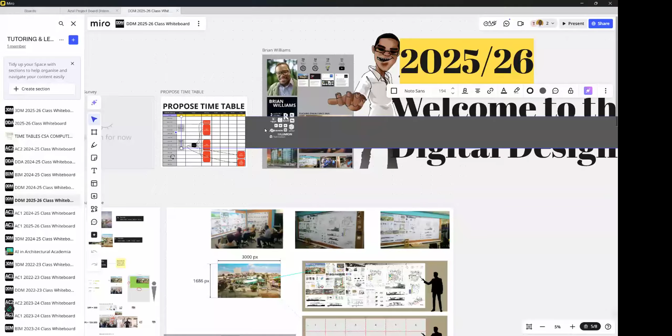All right, well for me, I use a few. I tried to put most of it on this thing here. Here we go. But I never got around to Rhino though. But I've used a few, and what I can tell you is I did put some of this together. So I've used a few 3D programs, and the idea is that for most of us, this will probably be our introduction to learning 3D.

And what we're going to do is we're going to kind of transition from 2D into 3D. Over the next couple weeks, well, hopefully we'll see what happens at the end of next week. Hopefully we have internet and light and everything. But I want to show you guys how you can use 3D to assist in your design process, right?

And I think to get a good balance for your architectural process, you need a program that you can use. You need some kind of tool to conceptualize. That tool can be as simple as paper, but I want to propose to you SketchUp as a tool to help you conceptualize ideas before you start to develop them further. This is before you go into Revit and into the rendering and all that stuff. This is just when you're ideating, like when you bring up a sheet of paper and you're just doodling and making some sketches and exploring some masses and sizes. Over the next about 2 weeks or so, we're going to be exploring how we can use SketchUp to do that.

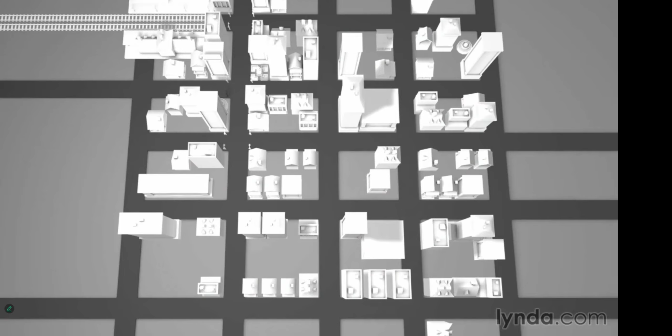The grid of the city represents 2 of the 3 axes. Any intersection in the city could be described via 2 numbers. For example, we could go to the building at the corner of 3rd and 4th. The floors of this building would be considered the 3rd axis in our 3D world. So a coordinate of 3, 4, 5 could be seen as the 5th floor of the building at the intersection of 3rd and 4th. In a 3D application, this same measurement system is how we manipulate objects.

When we move an object in 3D, we think of it as moving in a straight line, but the 3D application itself measures this distance along x, y, and z. Similarly, when we scale objects to make them bigger or smaller, we measure the change in size along x, y, and z. And when we rotate objects, we can measure that rotation as happening along a combination of the x, y, and z axes. As you can see, our natural world can be described using 3 sets of numbers. Understanding this coordinate system is the first step to working in 3D.

When we work in a 3D application, we're typically working in what's called a viewport. A viewport is simply a 2D window onto our 3D world. This window can be configured to view our scene in a number of different ways. So for those of you who managed to get onto the website version of SketchUp, which is here - there we go - if we choose create new document, this is our viewport.

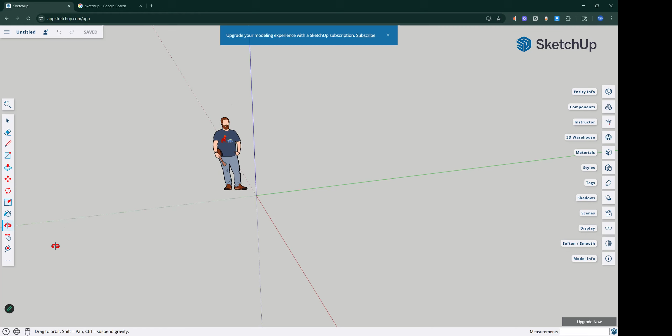For example, if we want, we can take this scene and view it in what's called wireframe. Now these wires are basically the geometry of our scene. If we want to go even simpler, we can go into what's called bounding box mode, which just shows broad outlines of the objects in our scene. Typically, though, we want to see the shapes of our objects, so we can also do what's called smooth shading.

Smooth shading allows us to see the shape of our objects. And if we want, we can also superimpose our wireframes over our shaded view to give a better sense as to where the detail of our geometry is lying. In addition, we can also add color, texture, and lighting.

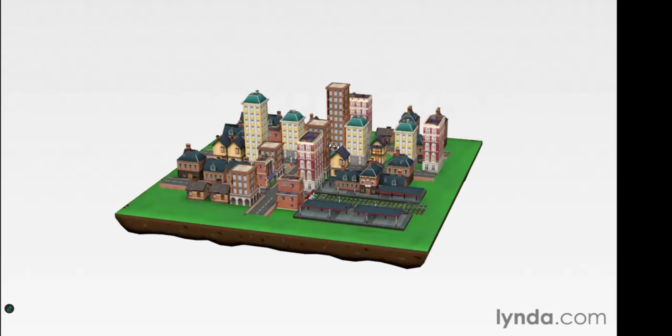Some of these features are software dependent, so each application will be a little different, but all the major applications will allow you to see your scene in multiple ways. Because we're viewing our 3D scene in a flat 2D window, we will need to navigate. Every software is a little different, but they all have pretty much the same navigation controls. Typically, we'll have something that allows us to orbit or rotate the scene.

What we're doing here is rotating a virtual camera around the scene. If you can picture in your head a camera that's moving, this will give you a better sense of how to navigate your scene. We can also take our camera and move it around to adjust where it's looking, and we can push our camera back and forth. This is called a dolly, so we can dolly in or dolly out.

Because we're viewing this through a virtual camera, we can do things such as change the angle of view or the focal length of our virtual camera. So we can zoom in and see this very closely, or we can zoom out. Again, we're just changing the focal length of the camera, like having a camera with a zoom lens.

In addition to this 3D, perspective, or camera view of the scene, we can also view the scene from a 2D perspective. This is called an orthographic view. For example, if we want to view the scene from the side, we can go into an orthographic view of the side, and this gives a parallel projection. In other words, this is looking at the scene directly from the side where everything is perpendicular and parallel.

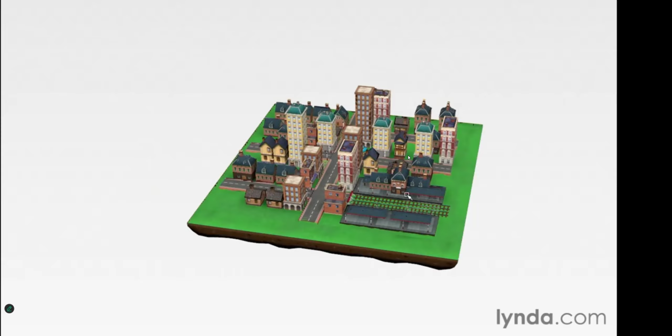In addition to this, we can also look at another view, such as a top view. Again, these views give us more specific perspectives on our scene that may allow us to adjust and manipulate the objects more precisely. But the ultimate goal is usually to get into the perspective view and be able to adjust the camera so we can take a picture of it, or render the scene.

All right, so all the things we just explored, we're going to jump into a 3D scene and do that. But before we do that, I'm going to take you on a journey from 2D to 3D.

So what I want you guys to do, I want you to open up Illustrator—you still have Illustrator, right? Anybody here have both Illustrator and SketchUp by any chance? Yes, sir. Yes, sir. Right. Yes, sir.

Let's open it. So when you open SketchUp, the local version, you would probably get a message like this. This is asking if you want to create a new model. I'm going to choose millimeters, and it's going to just create an empty model.

Here. All right, good, so I'm choosing millimeters. Come on, thing, it's taking its own sweet time. All right, cool. Right, so this is what you get.

So this is the viewport. All right, cool, so put this over here. All right, good, so this is what it should look like. Now I also have Illustrator open up as well, and you might be wondering why. So let me show you.

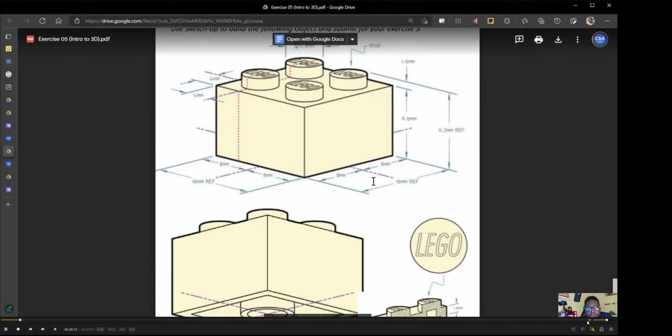Welcome to exercise 5. As per usual, if you log on to the DDM site and navigate down to exercise 5, you will see that it involves using SketchUp 3D software, and there are also some tips and descriptions of how to use the application on the handout. So you should see that on your handout if you go on the website. This first object is not to be submitted, it's just going to be done in class, and this second object will be the one that's submitted.

All right, I'll log on here. Here we go. There we go.

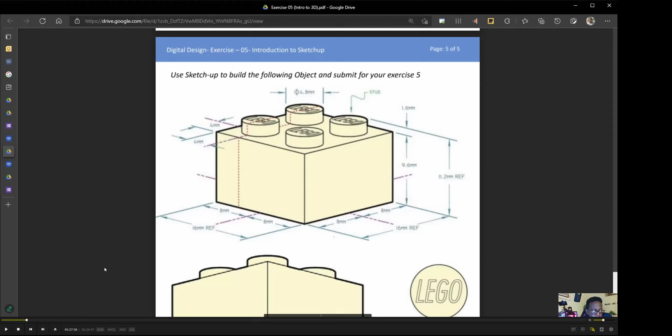There are different versions of SketchUp - there is the SketchUp application. So, everybody have their SketchUp ready? All right, cool, let's go.

Load it up. You will get a welcome screen like this, and then you will be asked to select a unit. You are going to select the millimeters version, the millimeters unit.

Now the next version of SketchUp runs in a browser. Before I show you that, this that you see on screen is the application. To see the browser version, if I bring up a browser and type SketchUp in Google, you should get the option - you just click on the first option that comes up. Then you would go to...

Was that a question? No? Okay, cool. Right, but as I said, the website changes from time to time.

So if you use that link in the chat, you can go straight to the SketchUp app and you don't have to click through all of these and choose free and all of that stuff - the web version of SketchUp. When you go here, you go to create new, and there you have it. So here we have the web version and the desktop version. You might notice that they look a little different - these tool icons here are on the side.

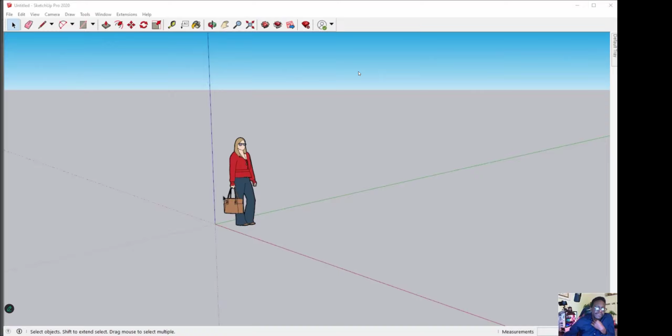Now, before we get going with SketchUp, I want us to make some quick alterations to the user interface that will make our experience a bit better - this is why we want to use a desktop version. First, I want us to go to camera, then change to parallel projection, like that. Then go to camera again and go to standard views, then select the top view.

Great. Next, we're going to go to view, toolbars, and we are going to turn off the Getting Started - you'll notice there is a Getting Started tab, and that tab is here. The Getting Started toolbar refers to this toolbar that you see on top, and basically what it's giving us is a good way to start off using the program.

But I don't want us to start with the Getting Started tab. Instead, I want us to turn that off and enable the large tool set. So we're going to turn off Getting Started, then scroll down and look for large tool set, which you can see here. And when you enable large tool set, you will get this tool set right here.

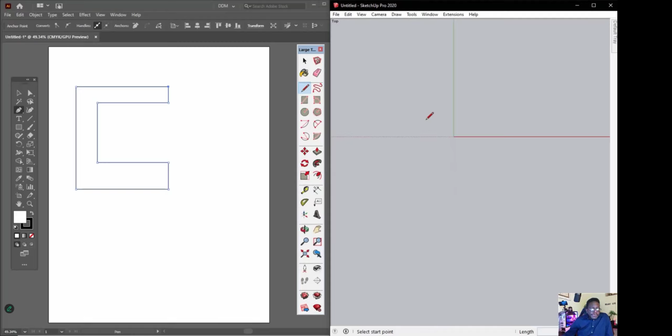Now, to navigate in SketchUp, we're going to use the mouse wheel to zoom in and out. Remember, before we get going, ensure that your camera has been set to parallel, and your standard view has been set to top. You can know this because you will see in the top left hand corner that there is a top icon.

The mouse wheel will zoom in and out, and holding Shift and the middle mouse button will pan around. So zoom with the mouse wheel, hold Shift and middle mouse button to pan around.

Now, if you notice at the center of your screen, you have your origin point, which is located here. This is basically the center of your scene. And you will notice that Illustrator does not quite have that.

However, in Illustrator, we do have a finite space to work with. If I zoom out here, all the way out, you will see that Illustrator has a finite space. You have to be working within this space here and not go beyond these lines.

However, when you're working in a 3D program, a 3D program has a viewport, which is essentially an infinite space. So because it's so easy to get lost in this infinite space, it's a good idea to always know where your center point, your origin, is. In our case, we're going to start drawing from the origin.

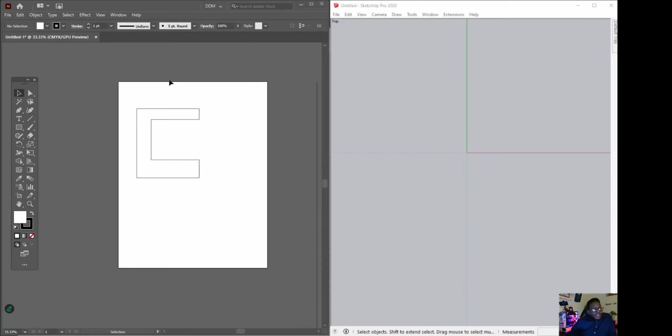Same again, red - this is how you know when you're at a full 90 degrees, because if not, the line would be black. Additionally, notice how these snap points come up when you try to draw, kind of like Illustrator, where it's helping you be accurate. It also gives you polar snapping, shown by these dash lines. If you hover at a point without clicking and move, you'll see a dash line you can use as a reference to know if the line is actually straight. That's pretty cool.

I want to stop just short of here, like that, then go. I can see it's aligned to this point because I've gotten my reference line here. Then I'm going to go up, and I can see this snaps to here. So I'll click again and click again to complete. Notice that it's a rough shape - this is a freehand kind of drawing.

Right, guys, anybody tried this with their SketchUp? Anybody? In the software, I've turned on the large toolbox, but I'm just watching the video right now.

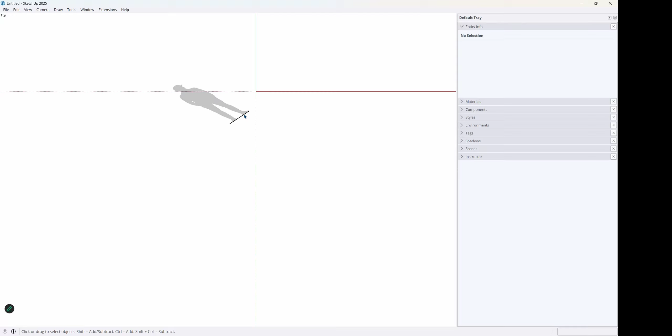What I would encourage you to do is, when you start it up, it's going to be in a perspective view. So go to Window, then View - I keep mixing this up - go to Camera, and then switch to Parallel Projection. Go back to Camera, and then go to Top View. I'm actually using a top view to do this, and I've deleted this guy that it came with.

And of course, go to View and Toolbar here, and then turn on your large tool set. I have a bunch of additional plugins, so you can ignore that. As I was saying, you can minimize the default tray because we're not going to use this yet. Here's the large tool set.

What I did was draw this thing, this letter C. It doesn't have to be accurate, it's just a little sketch here. Whatever, doesn't have to be straight. There we go, something like that.

Sir, I just want to state that it's kind of hard to follow sometimes because we're working on a different software - well, not really a different software, but we're working on a web version and it doesn't have the same. Right, exactly, kind of a bit hard to catch up. Right, so for the web version, no.

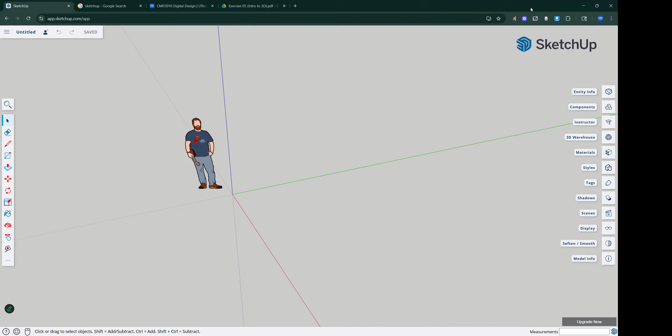Sir, just a question - you said we should go on camera and then press top view. I'm not seeing that on camera, sir. Is this in the web version? No sir, on the 2025 version. Right, so let's put this over here - when you go to camera, you go to standard views and then you see them. Standard views, okay, right. Yes sir. For the web version you'd have to go to - I don't know why they made this different, why didn't they make it the same?

Let me see if I can remember now - it should be on the display or camera. Sir, it's on the scenes, you find parallel projection. Exactly - like, thanks, like why not have the same thing? Right, plan view, there we go. And camera, parallel projection - there we go.

And then we use the pencil tool, which, by the way, the web version is kind of the free version, so it doesn't have some of the tools that this one has. But we can use it for this exercise. When we get into our second assignment, you're definitely going to need the power of the full version. But for now, just learning the program, you can use this version.

Right, this doesn't even have to be straight, you just can draw it. There we go.

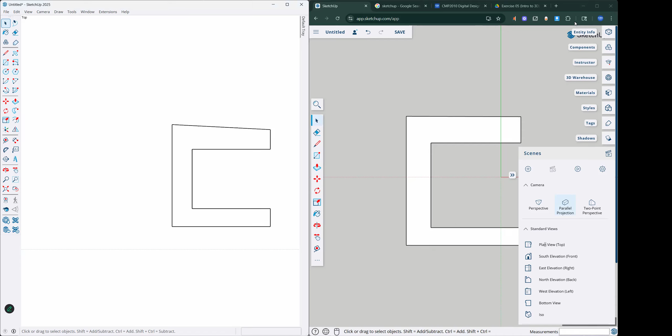All right, cool. Digitally drawing, but that's fine because that's what we want to do now, right? So that is pretty interesting.

Now, just like before, how we drew this shape here, but pretty much we are kind of stuck on this flat axis. Now what I want us to do is transition the shape we have just drawn into 3D. To do that, you're going to hold the middle mouse button and kind of push against it, click and hold.

You'll see the cursor change to a kind of orbit, and you're going to push or pull the mouse while holding the middle mouse button, and that will give you the ability to orbit. So I want us to try and orbit like this.

Now right away you notice a difference here, because what we have over here we can only draw on a flat piece of paper, whereas here now it is a full three-dimensional space.

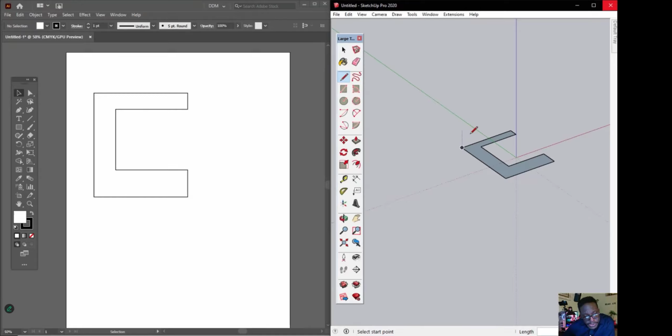So because it is a three-dimensional space, what I want us to do now is draw on the z-axis. Now pretty much we have been drawing on the x and y-axis. Our y-axis would be like this, and our x-axis would be going this way, but our z-axis is now going perpendicular, up this way.

So we are now going to draw along the z-axis now, and that will give us the ability to draw in a full 3D shape.

Now in order to do this, you have to use the orbit tool a lot so that you can know what direction you're going, because things can tend to get a little bit confusing when trying to go in 3D. So what we're going to do is full screen this, because we have left 2D behind, and now we're able to draw in the third dimension.

So let us continue here. This time, what I want us to do is draw this line vertically up. Notice how I'm getting this bluish purple color line now.

But if I continued on the x-axis, I would have gotten the green line. And if I- this is the y-axis, sorry- I would have gotten the green line. And along the x-axis, I would have gotten the red line. So that is how you keep track of how you are drawing, as things can tend to look a bit confusing in 3D.

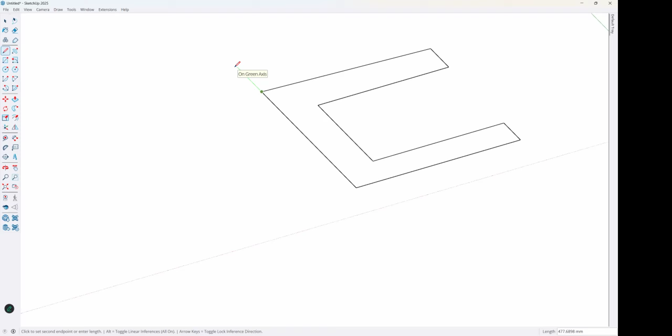But when it snaps to a color, you know. Yeah, sorry to interrupt, sir, but yeah, when I preview it along the x-axis, I'm seeing that color, but for the vertical now, I'm where you are. For the vertical, it doesn't look like it's perfectly vertical. It seems somewhat slanted, and it's not snapping to be perfectly 90 degrees. So if you try to- there you go. And you got your pen tool. Yes, sir, you're saying you don't see it kind of snap to the different colors? No, it snaps to be okay, for the x-axis it snaps to be red, but for the y-axis I'm not sure if it's perfectly vertical or it's just the angle to it, which I'm doing. Well, you kind of feel it, you know. You see, like when it does that jump, see that jump there? Does it do that jump for you? And then, of course, you would see the line, which would be blue. Are you seeing that? Let me actually press it and see if it's- right, it's 'cause you don't go vertical. Okay, cool.

Cool. Know that, okay, I'm definitely going along this flat axis now. Our red color- you know that, okay, I'm definitely going along this axis now. And of course the blue color, I definitely know I'm going upward on this axis now.

So I want us to use these color axis highlights to help us create this shape. So what we're going to do now is try to angle our shape in a way so we can go up on the Z axis. Let's kind of do it like that.

Now, it doesn't matter how tall you make this. The key thing is to make sure that you are on the Z axis. So we're going to do that.

Then we're going to come across along the Y axis. And what I want you to do while you're drawing this is to use the middle mouse button to just kind of hover so that you can have an idea of what axis you're drawing in.

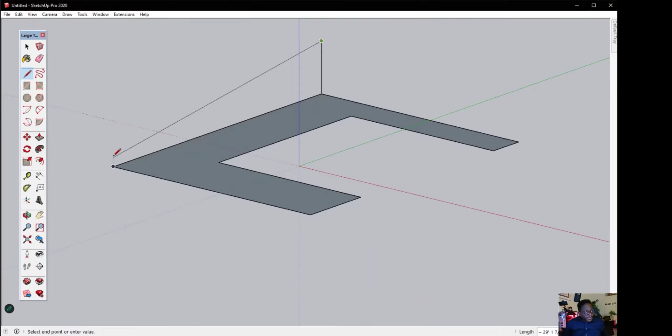Now, I want it to line up with here. So what I'm going to do is just hover at that point and slowly move my mouse up. And you will notice that it is giving me this line here that will help me align with this point.

Alright, so I'm going to go there and then attach it here. Now once I do that, notice that this also gets a fill color as well. And if I orbit around, you can see that I've clearly drawn a 90-degree angle here.

Alright, so we're going to continue with this shape to just get it done. We're going to go like this, and do that same thing again. We're going to hover at this point and slowly push the mouse up, and you will see where it will mark that out for us.

And we're going to do the same here, hovering from this point. There we go. We're going to do the same here, hovering from this point. If it doesn't work the first time, you have to just kind of go slow with it.

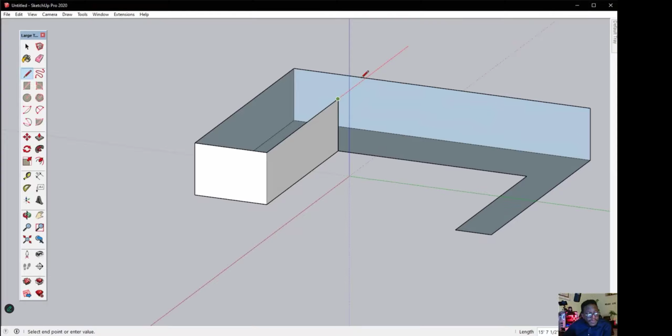Now this might be a bit tricky, because notice that this line is aligned with here. So in cases like this, you want to change your view slightly so that you don't have two lines overlapping over each other, because things will tend to get more confusing that way.

Then we're going to continue down here. Let's go slow. And down here. And across here. And we're going to go up again, like that, and then we're going to close this.

Now watch what happens when I close this shape. Notice that the entire shape closes, and when it closes, this simply means that everything is correct. And now we have drawn this shape fully in 3D.

So great, now that we have gotten the hang of this, we were able to draw this shape starting from a complete top-down view.

Now, what we're going to do is try another shape, but this time I want to change our view, so we're going to switch from parallel projection to perspective.

And that will give us a kind of perspective view. So when we angle here, we can clearly see that we are in perspective now.

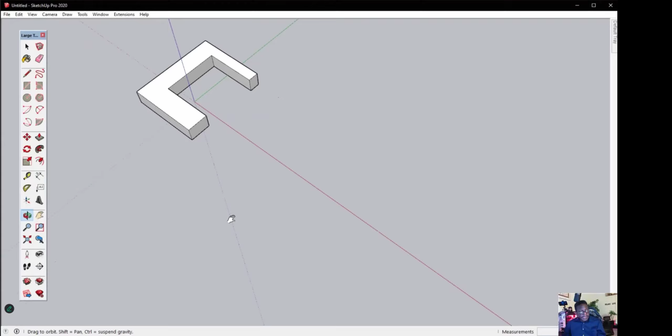And this time, let's try something a bit more complex. I'm going to sketch the letter E. To do that, I'm going to start at a random position, just like before, and try to keep these lines parallel. Remember, you know it's parallel based on the color.

Now notice that I'm drawing in full 3D, instead of a top view. So now you need to keep an eye on what direction you're drawing, because if I'm going upward on the z-axis, notice I'm getting a blue line, and if I'm going across, notice I'm getting a green line. So these lines become important, especially when you're drawing in 3D.

So I'm going to go up on the y-axis now, and when it gets here, I know that this line is parallel, but of course perspective can kind of trick us. Notice how this green line here, this line is actually parallel.

If you take a closer look at this, in perspective, this line is actually parallel to this line. But because it's going in a perspective, it's hard to really see that.

So this is why these colors become very important, because the green is telling us that, hey, this is parallel to this, even though from a visual standpoint, because of perspective, it doesn't seem parallel.

So we're going to go up. Now in cases where this might look a little weird, what you can do is kind of hold the middle mouse button to orbit your view.

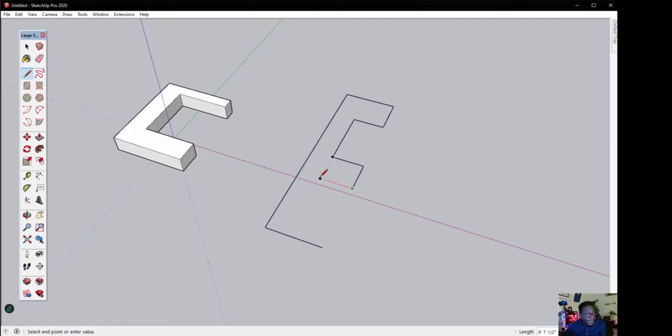There we go. We're going to go across, down, and you know, this is supposed to be fairly easy. What I'm doing is sketching, so we're not going by precise measurements, we're just kind of eyeballing it.

Okay, great. Now this time around, instead of manually drawing each side, we're going to use another tool called the push pull tool, and that tool is actually located right here.

And what the push pull tool will do for us is, if you just click it here, we notice that when you hover over a particular section, it becomes highlighted.

So you hover over the E, left click and hold, and push the mouse up, and what it does is extrude the shape for us.

Now, I believe with newer versions of SketchUp, you don't have to click and hold when you push it up. Once you hover over the shape and click once, you can just raise up the shape.

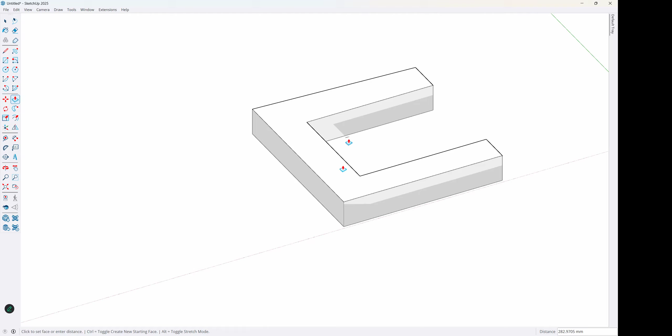You just click and release once. You don't have to click and hold and push it up. You just click and release and then move the mouse, and it will set the height.

Now this is true on any surface. So for example, if I go back to my original shape here, I could extrude this higher or lower. I could extrude the base higher or lower, and this is all using that push pull tool.

So far we have used the push pull tool, and we have used the selection tool. We know that the selection tool allows us to select different objects, and the push pull tool allows us to extrude an object. We have also used the pencil tool, and the pencil tool we have used to actually create shapes.

A further breakdown of what these tools do are found on the handout itself. So if you go to the handout, you'll notice that there's a short description for each of these tools here. So in case you don't quite remember what they do, you can always refer to this.

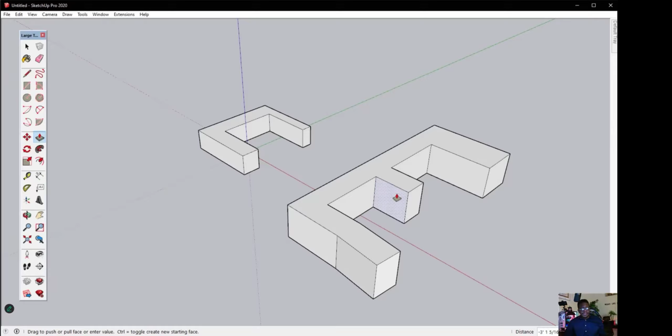Now that we've gotten the hang of this, we are going to explore how we can do this using measurements, as what we've been doing so far is kind of freehand 3D modeling, which is what SketchUp is great at. To be instantly able to pull or push different objects is really awesome, because if it was a building, you would be able to explore different ways of doing something just by pulling and pushing. It's a great tool for doing massing, and it's also good for doing accurate massing, which we will see now.

All right, guys, so anybody tried that out? Yes, sir. Finished there. Yes, sir. All right, pretty cool, right?

Some of you might be using SketchUp for the first time, but some of you might be used to it already. One thing we can all agree is that it is dead simple. Literally, like how we use the pen tool in Illustrator to draw something, now we can do the same thing, but we can go in the Z-axis. And the interesting thing is that 3D is actually a type of vector. Remember we spoke about vector graphics - what is vector? It's using lines. And a 3D shape is made up of lines.

What I love about SketchUp is that it lets you do the best of both worlds. It's kind of like Illustrator where you can draw a line or a box or whatever, but now you can draw in the third dimension. You understand?

Yeah, Levy. So is there an undo button? Yeah, Control Z. What's the redo button? Control Y. Okay, sir, right.

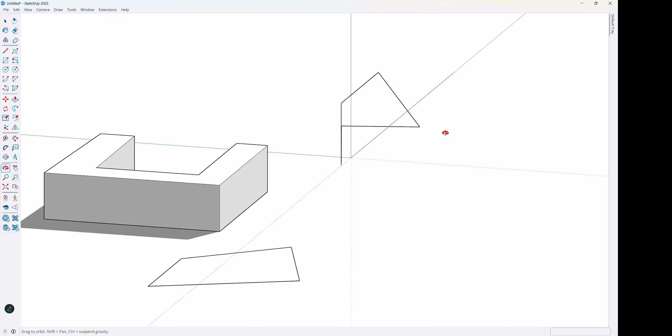So this is called a non-coplanar surface. Coplanar means that all of the planes are flat. So when it's non-coplanar, it means that the flat polygon, the surface of your 3D shape, is not flat, which is obvious. This isn't flat because this is doing some kind of crazy shape.

All right, so now when we open a new SketchUp, notice that before we selected the architectural millimeter template. This time I want you to start a new document, choose millimeter again, and we're going to run through how to create this with dimensions. This is the difference from before, where we were just drawing randomly and sketching. Now we want to draw with precision. This is still practice, not the class exercise, so if you're already advanced in SketchUp, you can skip ahead and do the exercise directly. But if you're using SketchUp for the first time, definitely follow along.

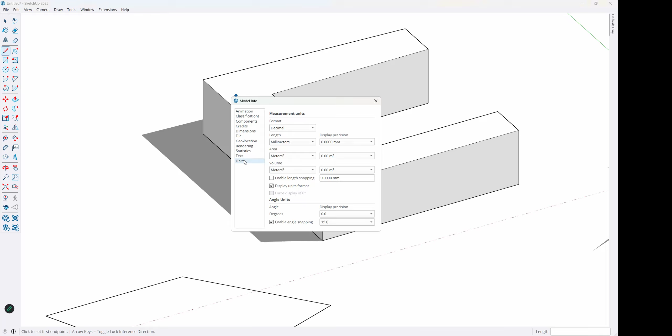When I created a new file, I didn't see a dialog box to set the dimension. That's fine. If you didn't see a dialog box for any reason, you can just go to Window, then Model Info, and you will see Units there, where you can choose the units. So Window, Model Info, down to Units, and you can choose decimal millimeters.

All right, let's continue. If you're just jumping in, skip the first warm up and jump straight to this, since we're still warming up.

You might not have selected the right units. We can change the units by going to Window, Model Info, and you will see Units right there, and we can change them. My units are currently set to millimeters and decimals, and that's how I know my units. Because I selected the template, those were already set up for me. If you selected the incorrect template, you can set it up here. You can also change these measurements at any time during your drawing, and it will automatically adapt—your drawing will not be out of scale. All right, so I'm going to close that.

Now to get going here, the first thing I want to do is remove our reference object. So I'm going to click it. Notice when I click it, you see this blue highlight comes around it. This highlight here is known as a component. Now, how do I know it's a component?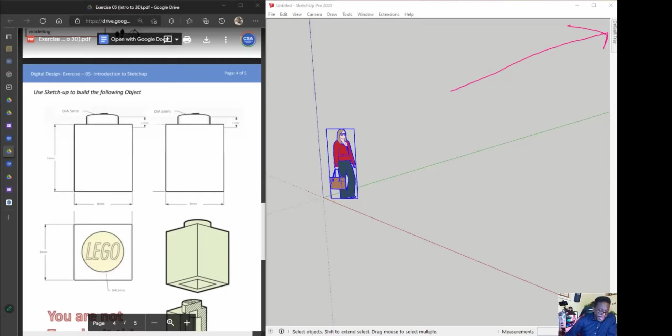Well, there is actually information on the objects that you select, and that information is found on our default tray. Remember, that was the tray that we minimized over here. So if I maximize that default tray and pin it, let's pin it there.

Notice that any object I select, so I select this object, and it tells me some information about it. It tells me that it is a component, it has a definition, kind of like a name, and that it is untagged here. There are also some options here that you can use to turn it off, lock or unlock it, and so forth. So that is where I would get model information.

Now we don't need this now, so I'm just going to close that out, and we definitely don't need this model, so I'm just going to delete it.

Now the first thing we need to do is look at some of our dimensions here. So I'm going to zoom in here. This form of modeling is called solid modeling, because essentially what we're doing is creating this shape from solids.

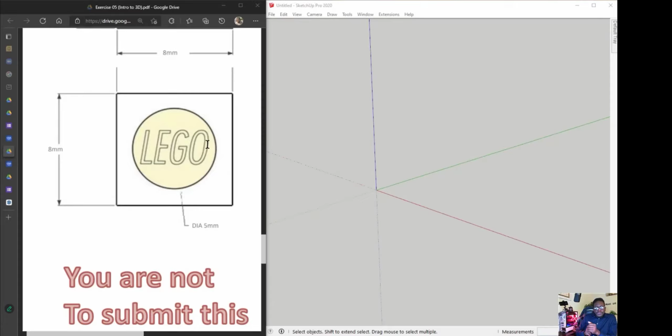So when beginning to model, the first thing we want to do is think of it as creating a sketch. Some of us can draw by hand, and if we see an image we want to replicate as a sketch, we picture the image in our minds and then try to execute that using our hands. In this case it's similar, but instead of using our hands, what we're trying to do is think about ways that we can construct this Lego block together.

So let's look at that up close. One approach we could take to create this Lego block, I'll single it out here. Well, we could draw the base first, and if we translate this in plan view, it would perhaps look something like that.

Then what we could do is translate these measurements, so these measurements here would be equal to the measurements here and here, and so forth. Remember that this is the plan view. Then also notice that there is a height measurement next, so we could use the push-pull tool to push this shape up to that height.

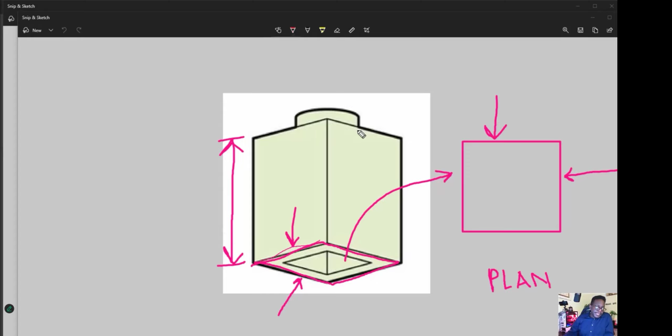So when you are creating a 3D model and you have to construct it, this is the kind of mindset you need to have. You need to break down your shape into basic forms and try to create those basic forms, then manipulate them to get the details that you want. So let us investigate that.

So if we now use this approach, we would first need to draw this base here. Now it is 8 millimeters and it is a square, so it should work out to 8 by 8 millimeters. Now, how do you know what is 8 millimeters? This is where things might get a little tricky, because 8 millimeters is actually quite small in comparison to that model that we had. So the first thing we could do is...

We could get our pencil tool in SketchUp. There we go. We're going to start from the origin here, and let's pencil out our plan first. So we want to draw pretty much a shape like that, and then we want to use a push-pull tool to extrude the shape upwards. That is our game plan.

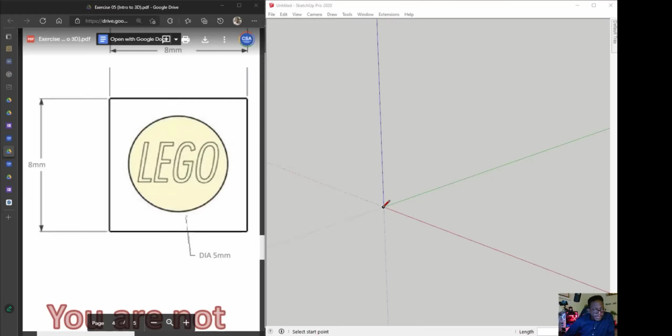So in order to do that, we are going to first draw that shape. We're going to choose the pencil tool first, then click once. Now we're going to drag along this red line here.

Yeah, what's up? Do we have to do it in millimeters? Would we be able to just scale it up? I would say to practice it in millimeters, because for the exercise you have to do it in millimeters. Has to be done in millimeters. Mm-hmm, all right, just to get your practice right of dealing with units and stuff. Like, because we're still warming up with this exercise, so if it's not accurate, that's fine, because you're not submitting it.

But for the one after, I was looking at the actual one, and it says like a 9.6 and an 11.2, and my SketchUp, yeah, it's in meters. That's millimeters, but my SketchUp doesn't allow me to go into half millimeters. It's only, I can't do 9.6 millimeters, it's either 9 or 10. Yeah, man, you can. To do that, what you need to do is go back to Window and go to Model Info, and you need to increase the precision. So you would put the precision to 0.0.

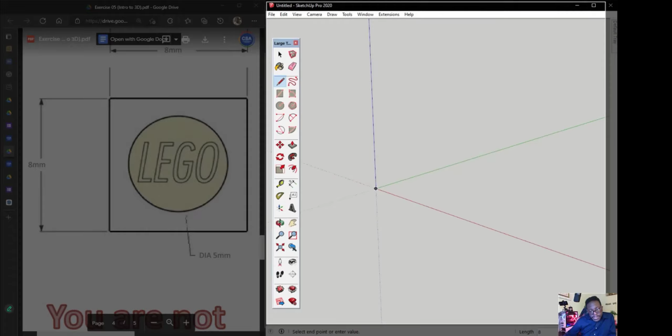So now in order to get the 8 millimeters, you're going to hover along the edge of this red line, then type 8. Now when I press the letter 8, notice that it shows up in the bottom panel here, and that is the 8 I just typed. Now the line is not 8 just yet - I need to press the enter button. So hover along the line, press 8, then enter. Now notice it has given me a line that is 8 millimeters.

Then I need to go across, and I'm going to press 8 again and press enter. Remember, I'm in perspective, so even though these two lines are parallel, it doesn't appear to be. So I'm going to come back across, and it's important that I hover and the line is red. There we go, and I'm going to click back here. So pretty much what we have here is the base of our model, this section here, which is what we just drew.

So what we need to do is use the push-pull tool to go up, and that would allow us to get a shape roughly like that. Alright, so let's go.

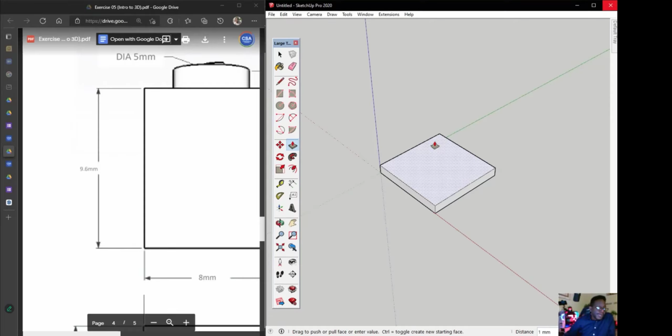We're going to use the push-pull tool, and if you remember where it is, it is this tool right here. So we're going to grab the push-pull tool - how tall should we make this? Well, we can see here that the height is 9.6 millimeters. So we're going to hover over it - you need to hover for it to be highlighted. Notice how when you hover over it, it becomes highlighted with dots, so make sure that it's highlighted. And you're going to click once, move the mouse up, then type 9.6 and press enter.

Alright, great, so now we have the basic shape. As a matter of fact, you can start to see the shape come along nicely here.

Now we do need to draw this circle on the top, and if we look at the top view, we can see that the diameter of this circle is 5 millimeters. So that would mean that between here and here is 5 millimeters.

Now this is where the sketching skills come in, because we know that the circle is at the center of this box here. We also know the full length of this box, and if this is at the center, then essentially you would need to subtract 5 from 8, which you would get 3, and that would mean that each of these distances here is 1.5 and 1.5. Alright, so do you guys understand how I worked that out?

Pretty much, yes sir - technical drawing basics, right? Come back again, yeah, basics.

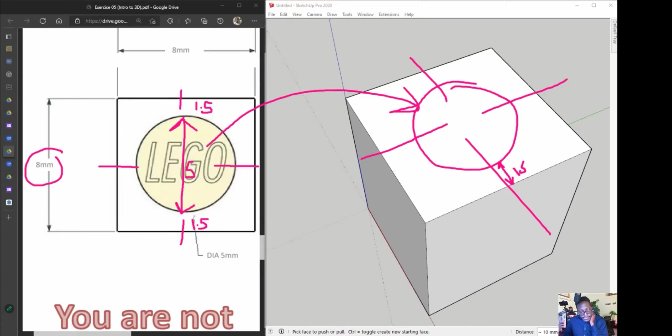Alright, so this is just from doing the simple math. Now, if we look back at our model, we know that this circle should land somewhere in the center here. We know it's going to be in the center of this line here, and we know that these distances here should be 1.5 for each area. So in order to do that, we're going to use another tool in our arsenal - this time we are going to use the tape measure tool. Now the tape measure tool is located here.

That's the tape measure tool, and that tool is primarily used for you to set up reference lines. So, I'm wondering, does the online version have the tape measure tool? Oh yes, yes, okay, lovely. Good, know where offsets are, centers of things, distances. So we're going to test out that tool now.

Right now, to use the tape measure tool, you click on it. In this case, we want to find the center of the shape. Now we could do that by simply drawing some diagonals, from here to here, and from here to there. Tape measures are reference shapes, reference objects, so this is actually not cutting the actual model.

Just as a reference, I'm going to undo this - you don't need to follow me with this example here. But if I use the pencil tool to mark out my center, drawing a line here and here, you might say this is doing the same thing as my tape measure, but actually it's not, because what this actually does is split the mesh. So for example, if I use a push-pull tool now, you'll notice that these are actually independent shapes because I've literally split the mesh.

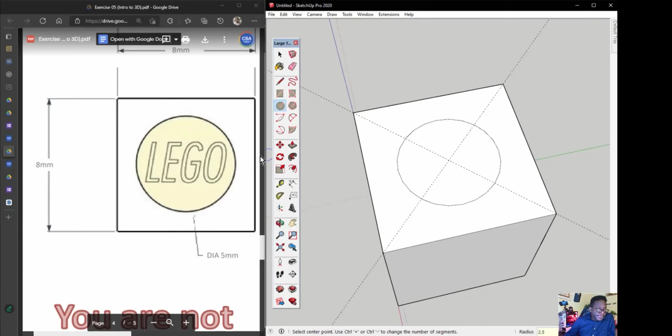All right, great, so this would represent where this circle is. Now our next step is that.

I was just wondering, where can I find the circle tool in SketchUp web? In the web? Oh, yes sir. Well, if they don't have it directly in the web version, they have the rectangle tool. Do they have the arc? Oh yeah, they do have it - you have to expand it with the 3 dots. So it looks like they do actually have the same amount of tools.

Almost, yeah. So you just expand it with the 3 dots.

This actually has a height of 1.7 millimeters, so we're going to grab the push-pull tool now and push this up 1.7. All right, so you can kind of see now how it is coming together. Now, of course, there is one major component we have to consider - this is how the inside of this Lego block looks. But obviously if we look underneath, we can see that this is a solid block, but we need this block to be cut just like this, so it's going to require more sketching, 3D sketching skills in order to figure that out.

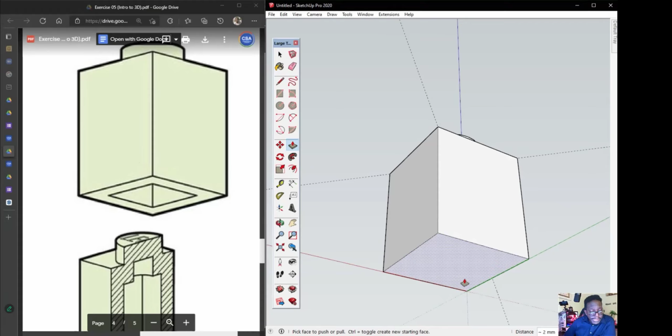Now, the first thing we want to get is, what about this hole in the bottom? If I look underneath this now, you can see that I don't have a hole here, but there should be a hole like that. So therefore, you're going to need that distance here - you're going to need the distances here in order to know where to cut this hole.

Now, in order to get that, if we look carefully on this sketch, we can actually see that this edge here basically aligns with this line here. So we can actually use that assumption in order to know how wide this is, and we know how wide this is because we know the diameter of the circle. So that means this length would add up to 1.5. So what we're going to do now is draw this 1.5.

Now, to do this, let us try and explore yet another tool. The tool that we're going to use is going to be our offset tool, and our offset tool is located right here.

So for online, use the 3 dots to access the offset tool. And what the offset tool does, well, it does exactly what it says it does. Ideally, I want to offset this entire edge, and I want to offset it inward. So all these 4 lines I want to offset inward so that it gives me an inner edge like that. So in order to do that, we're going to choose the offset tool.

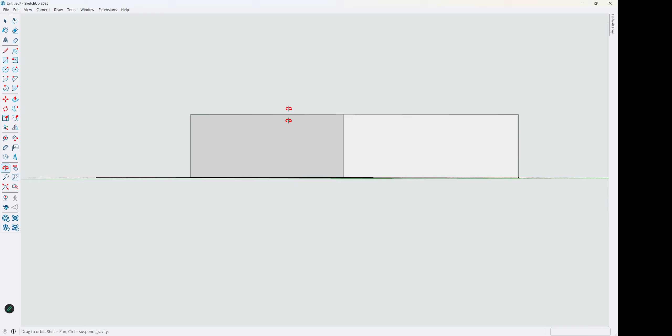Sir, how were you able to position yourself underneath the ground plane? If you use the middle mouse button. I don't have a mouse with me, I'm using the trackpad. Well, if you have the trackpad, then you're using the regular SketchUp, local. So you would need to use the orbit tool, which is this tool right here. Orbit. Rotate. Okay, orbit. Right. And then you would just click and hold, and that way you can move it around. Okay, beautiful. All right. And I would have missed the offset tool, I've just been using the tape measure. Right, so the offset tool now, you will see there is this one that kind of looks like a circle with an arrow, that's the circle offset. And if you're a shortcut junkie, all right, I see it, it's F, I think it's F? I see it, yeah, right, great. Thank you. Cool.

Here is going to be equal to this distance here. And we know this distance already because that was here, 1.7. So that's what that distance is.

So hence we can assume that this inner part here is also 1.7. And if that is 1.7 and the total height of our box is 9.6, then that would mean that we would need to minus 1.7, and that would give us the length here, which of course would give us a total of 7.9. So we know that we need to extrude this inner face upward 7.9 millimeters.

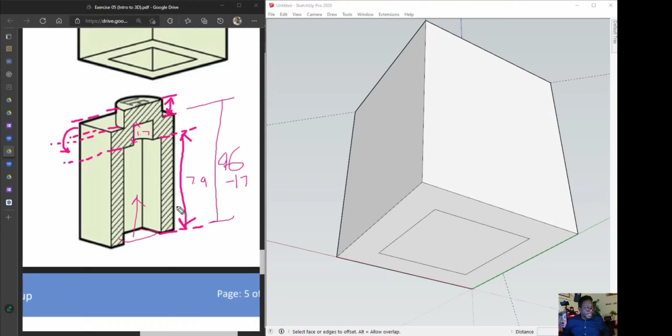So to do that, we are going to go back for our push-pull tool, but instead of pushing out, we want to be pushing upward, and we know that that upward push should be 7.9. All right, so now that is the correct length.

Now we do need to figure out what is the dimension here of this circle. And once yet again, we're going to be turning to our 3D sketching skills, and these skills are things that anybody in the design field should know. We should all have an idea of proportions, right?

So now we can see that this distance here is the same as this distance here. So we know that this has an offset of 1.5 and 1.5 on this side, so that is a total of 3. Then now we know we would need to subtract that from the total dimension of the circle, and the total dimension of that circle is 5 millimeters. So hence 3 from 5, that would leave 2.

So that would mean that what would be left within here is actually a 2 millimeter diameter after we take these out of it. So that means that the diameter of this space is 2. So what we need to do is do the same thing again. We need to draw a circle inside here, and then we basically need to push that upward so that we can get the space inside this space here.

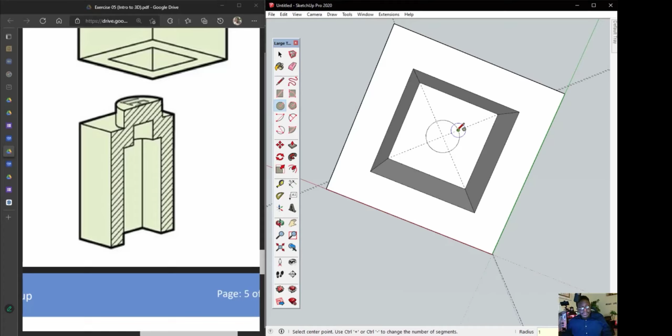So to do that, we are going to go for our tape tool again, and we're going to just find the center of this space. We're going to use the circle tool and go here, and we know that this should be 2 millimeters. All right, actually no, 2 millimeters is the diameter, so the radius would actually be 1 millimeter. There we go. So now this space here is equal to that space there, and we did that with simple proportion and math.

Now this space needs to be pushed upwards to cut out this space here. So how high upwards does it need to go? Well, we need to go to here, and we can see that this is aligned with that area there. So henceforth it's the same depth as the top here, and that distance was 1.7. So we're going to grab our push-pull tool, and we're going to go up 1.7.

All right, now we basically have our shape there. However, there's one element left - you can see the word Lego is written on top. So we need to go back to our large tool set and use the 3D text tool.

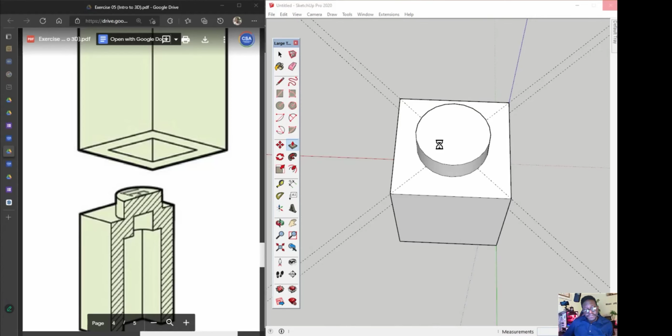To use it, we just click it and wait, and this will pop up. We're going to type the word LEGO in full caps. Then we choose a font - let's use Arial, and make it Arial Italic. Maybe we could do italic and bold so it's big. Then we choose OK.

Now this text is kind of big here. It's asking us where we want to put it, so we can just plop it down anywhere, and then start to resize it.

So we click, highlight it, and go to the scale tool. The scale tool is yet another new tool, located here. Once you click it, you'll see green boxes around it. Grab one of these corners, click it once, and make it smaller. Let's try that one more time.

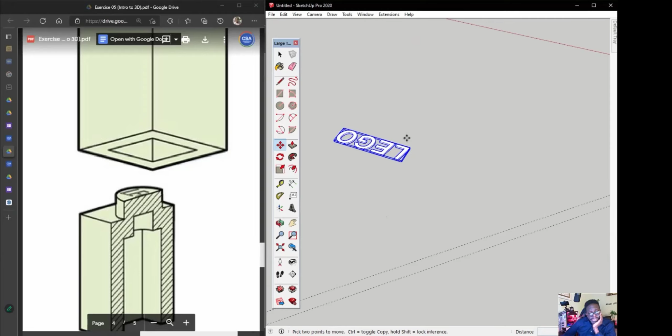Now we're going to use the move tool, located here. How it works is you choose somewhere to grab the shape - I'll grab it right here, click once, and notice it's stuck. So I'll zoom out, zoom in, and hover over somewhere random. Then I go back to my scale tool and rescale that, then go back to my move tool, grab it from one corner, and put it somewhere.

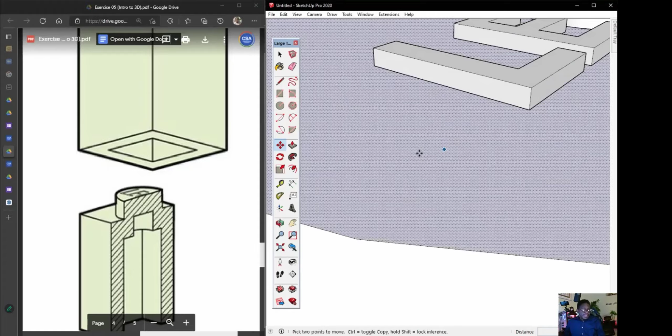Now, if you're having trouble moving this in 3D, what you can do is go to camera and switch to the top view. Then you can try to move this around, and that should be way easier. Let's try grabbing it somewhere outside - that may not work out so good, let's try.

Now, in order to test if our Lego is correctly done, there's another tool I want to introduce - the section tool. To use it, here's that tool here, we click on it, and it creates this section box. I'll stick it right here, and it asks you to name it - I'll leave it at the default name. Then use the move tool to move this section by clicking to hold and moving it. When you look, your section should be pretty similar to this, so this is how you know what you've done is accurate to the paper.

Okay, so that is the basic premise of using SketchUp to create this shape.

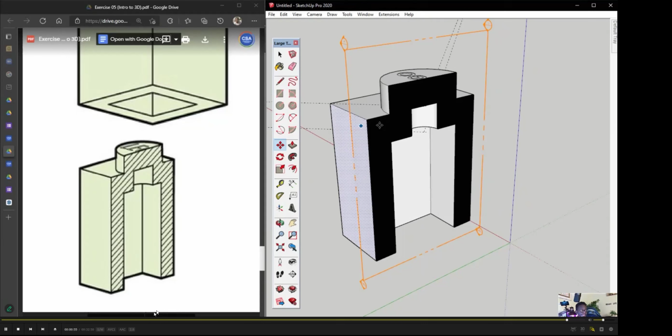Could you go back on how you did that section again one more time? Sure. So what you want to do is the section tool - that's located here, it looks kind of like this.

Once you click it, it's going to snap to the different surfaces of your model. Notice if I go to the top, it snaps to the top. If I go to the front, it snaps to the front and back. So you choose one of these faces - let's say I choose this face. I click once, and it asks me to name the section. I'll leave it at that and choose OK.

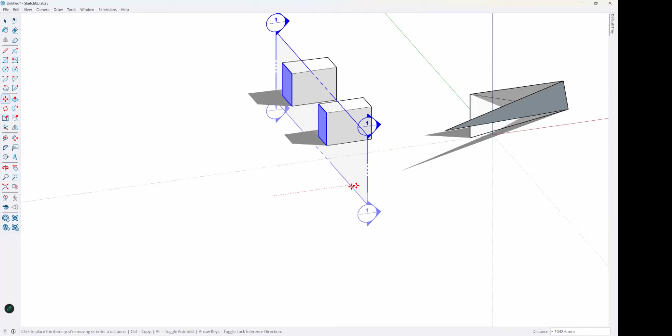Then all I need to do is move this section line. I go to my move tool, which is here, click and move this section, and it cuts it, which is pretty cool. It will cut through everything in your scene, regardless of the size of the section line - notice it encompasses all of the objects in your scene.

So click the section tool, hover over the face that you want to cut, click once, and then move it.

For me, once I click it once, that's it, there's no more. Yeah, then you move it. You go to your move tool and move it after that. Okay, right, you move it around like an object.

Right. Yeah, now it works for me, sir. All right, cool. All right guys.

There's one more part to introduce you to, and then that's pretty much it for our class today. This is a superpower that SketchUp has. I'm telling you guys, if you can master the combination of SketchUp and a part of SketchUp called layout...

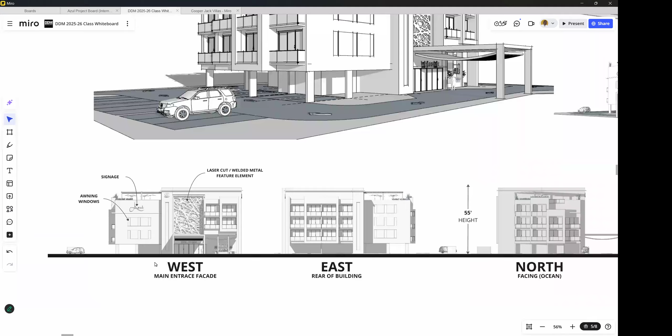Maybe it's a sheet that you're pinning up. You have your model, this is in SketchUp, and then you have different views. You also have labels, dimensions, titles, and all of that on one sheet. This is not Photoshop, this is not Illustrator. All of this is done with SketchUp and layout.

This is actually a concept for a hotel building. So the idea is that you create a sketch concept and then you lay it out on a sheet all within SketchUp, right? You don't even have to go to some other presentation software. The benefit of this is that you can get dimensions and sections directly in the program. So that is some pretty cool stuff that you can do with layout.

So layout is only available with the desktop version of SketchUp. So those of you using the online version, unfortunately, you won't be able to participate in this part.

When you install SketchUp, notice you get two icons on your desktop: one says SketchUp and one says layout. So they're kind of like the same program-ish, or almost like two different programs.

So what I want you to do is open layout on your computer. If you just go to layout and open it, it will look something like this, and you'll even notice the splash screen, it shows you a little startup screen when layout is starting up. Let me see if I can grab a screenshot of it.

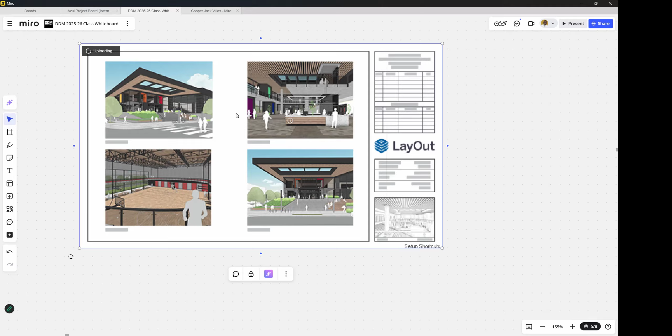Oops, okay. Oh, there we go. I'm gonna make this bigger.

I'm leaving this example here so you can see what it does. So that is essentially what layout is. This is going to be a super tool for you guys, because after you finish doing most of your conceptualization, you use this tool to lay it out. Now, this is not necessarily a tool to replace Revit, Chief Architect, or AutoCAD. Think of it as a way to just present what you have created in SketchUp.

Anybody here have access to layout? Those of you who have the desktop version? Yes, sir. Right. Sure. Really simple to use. So we're just going to take like 10 minutes just to kind of discover it a little bit, because as I say, guys, this is going to be a super tool for you guys.

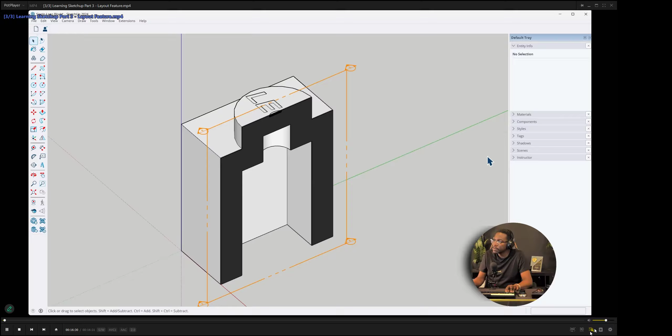Okay, so now that we have our model cut as a section, we're going to look at how we can place this model into layouts where we can generate multiple views. In order to do this, we're going to create various scenarios here. So I'm going to delete this section line, and what we're going to do is save different scenes first.

So let's say that this is a particular scene that I would like. I'm going to go to styles because I want to set how I want my model to look, and I don't want to have it in this gray background. So when I go to the default tray and go to styles, I'm going to go to default styles, and if I just make this a little bigger here, I'm going to choose the hidden line style,

or I will choose this style here, which is the construction documentation style. I think that one is a good style to use.

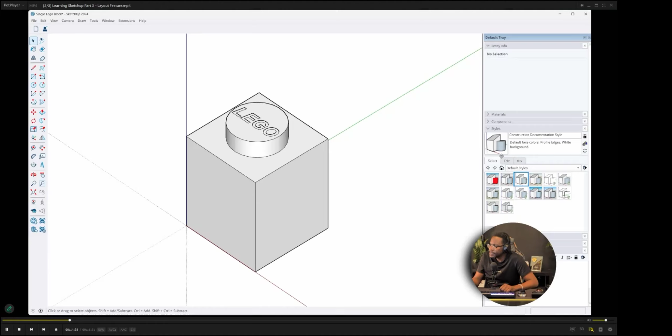All right, now that I've selected the style I want to have, I'm going to now go to scenes, and I'm going to click this little plus here, and this will save this as scene 1. Right, so what I'm showing you there, because it's kind of hidden behind my face,

is in the default tray here, you will see, and what I do, I minimize all of them. So you probably have the instructor one up. I'll just choose this little side button here to minimize them. So in styles, these are the different ways that you can represent your model. So I went to default style and I chose the construction style, which is that. And all it does is just control how the model looks.

Now, after I finish with styles, let me close that up. I go to scenes, and what scenes do is save your view. So for example, let's say I like a view with just this alone. I like this view. Then I just click the plus button here and it saves this as a view. Now let's say I like a view where I'm seeing everything from this way. Then I just click the plus button again and now I have a different view. And I can go between this view here or this view here. So what I'm doing is saving different views of the same model, which is pretty cool.

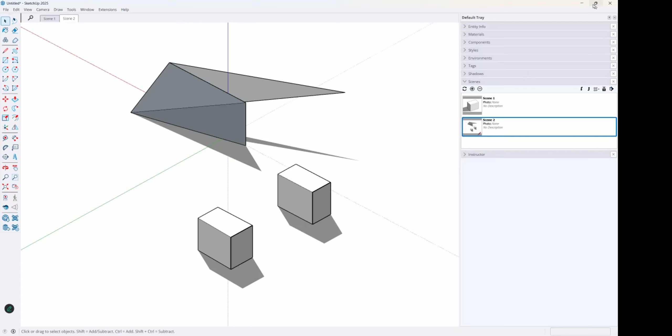Now, I want to take another view like this where I can see underneath my model. And then I'm going to save this as another scene, so I'm going to hit that little plus again, like that.

And then for my third shot, I want to have a section view. So I'm going to go back and put back my section line by clicking the section tool here. Look at that. Then I'm going to go to my move tool and just move this roughly about to the center of here. I'll zoom in a little bit.

And then this will become my third scene. So now I'm going to click the plus button again, and I'm going to choose create scene. So notice I have 3 scenes, and up the top here you will see I have 1, 2, and 3. So if I go back to 1, that's what it's like. And if I go back to scene 2, this is a view from underneath, and scene 3 is a section view.

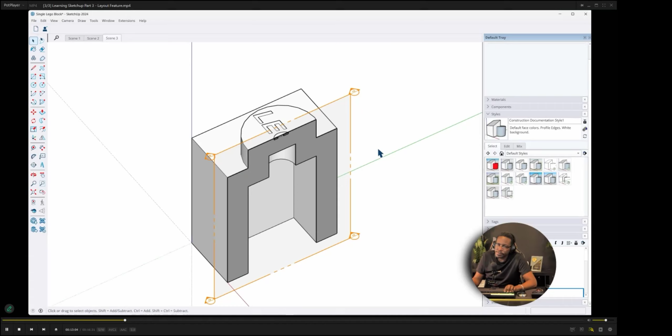Now I could do one more scene, so what I'm going to do is, now I want to create my 4th view. So what I'm actually going to do is I'm going to deactivate this section, and then I'm going to go to view and to camera, make sure that I'm on parallel projection, and go to standard views and go to top, and then I'm going to hit the plus button again, and now it will save it as scene 4. So now I have 1, 2, 3, 4, and those are my views.

So next, what I want to do, I want to go to file and go to send to layout.

It's going to ask me if I want to save this model view right now, and I'm going to say yes. Then it's going to open the SketchUp Layout. Now Layout is a kind of sister program to SketchUp, and what it does is use the main model to allow you to generate multiple layouts using the 3D model you just created.

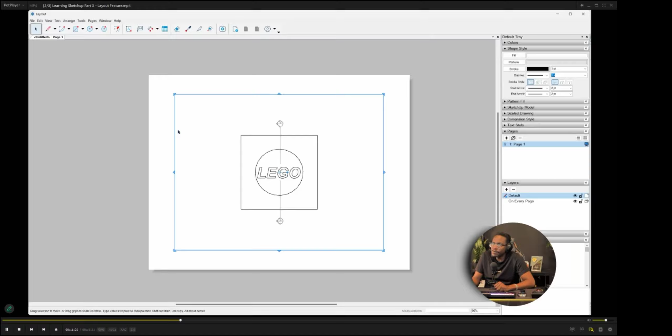So for this purpose, I'm going to just choose a letter landscape, and notice how it gave me this view here. Now I'm going to put this view—I can click on it, and notice I have these four corners here, so I can crop the view if I want.

I can make it smaller, size it smaller like that. I can move it around and put it anywhere on my sheet.

Now notice there are also some icons up here. This is like a 2D-only view, kind of like using Photoshop or maybe Illustrator, where I could just use my pencil tool and draw random lines, or grab my text tool and start to type in a text box, and I'm able to move that text box around just as I would normally move a text box in any typical application.

Now there are some other shapes up here. For example, I have dimensions, annotations, and labeling, but more importantly, over here on our default tray, if I minimize all of these...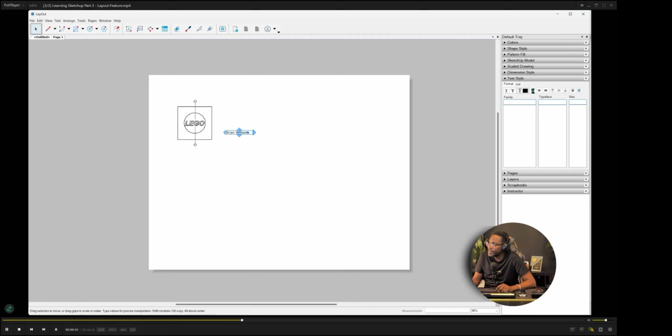You will notice that these are all different properties based on the items we have selected on our sheet here. So for example, if I click on this text I just placed, notice that under text style it gives me things like justify left, justify right. I can change the size of the text, whether it's bold. I just put this down in the left corner right here.

Now I can also select the drawing I have here, and there are a bunch of different settings I can change with this model. Keep in mind this is simply a window into the 3D model you just created—I've taken a snapshot of the SketchUp model here, and brought that snapshot into this new program called Layout, where I can now apply additional options to it.

So with this model selected, I can go to SketchUp Model, and if I expand this down, you'll notice there are different subcategories. For example, here are all the views I saved out: scene 1, scene 2, scene 3, and scene 4. So I can manipulate them from here.

There are a couple other options here, but the one we care most about is scale. Right now we're not using any particular scale, and we're using our orthographic view. We also have other effects like shadows and styles, but we're not going to change those settings because we already set the style inside our SketchUp model.

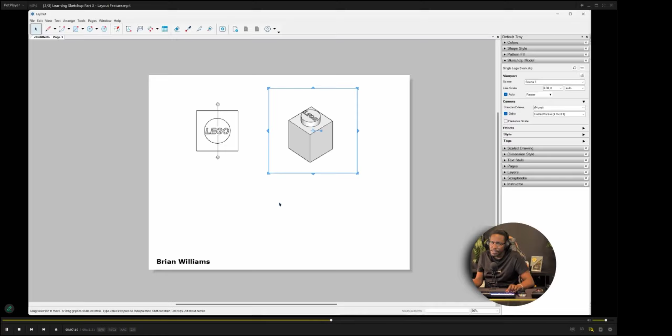For example, I can click on this view now and change it to scene 1. So now I have these two scenes, but they're linked to the same model, which is pretty cool. I can select both of these, copy them, paste them again, and move them down, so now I have four different models, each as a different scene.

Now the great thing is that they're all linking to the very same model. So if I go back to my original SketchUp file and decide to edit this model—in this case, I'm going to put a little shape right at the corner and extrude that upward—now I have this additional shape here.

Now I'm going to hit save and go back over to the Layout application. Notice you don't see that change yet, and this is because I need to select the actual model and choose this reload button.

Now notice when I do that, everything becomes updated, and you can see the change I just made in SketchUp. This retains a live link to the SketchUp model, and that's excellent because now we can move back and forth between SketchUp and Layout.

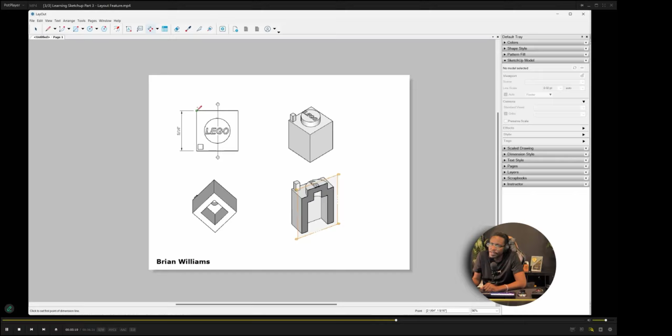Some additional things you can do: you can dimension from this view as well. If I hit the dimension tool here, I can draw dimensions in plan, and I can even draw dimensions in 3D views, which is pretty cool. I can also choose labels.

Now, one thing to keep in mind is that these labels are not part of the original model. What does that mean? If I go back into my model and change the length, then hit save, and go back here and under SketchUp model choose to reload the model, notice that everything changes, and in this case the length automatically changed as well.

It's very possible that these linkages can be broken because this is simply a 2D overlay detecting the 3D corner in the SketchUp file. So if we make significant changes to this shape, we might lose this dimension and have to redraw it. We can also undo that change, save again, and come back here to update the model.

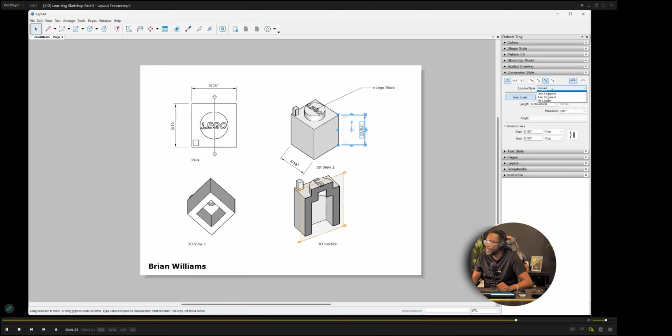Now there are a host of other things we can do in this layout view. For example, we can put different objects on different layers, add additional pages to our model, and change things like dimension style if we want a dimension displayed a little differently. So in a nutshell, this is what the layout view is.

Now that we've finished this layout, we can save this file. SketchUp will save it as a layout file format, a .layout file, and this file always references the original 3D model, so it's a good idea to save it in the same folder as the model file. We'll call this 'layout sample.'

Now we can go ahead and export this as a PDF. There we go. And now we have a PDF of our layout. What do you think, guys? Pretty cool, right?

Yes, definitely, try it out. So this is why I was showing you my example here—this model was created in SketchUp, but I didn't have to go to Photoshop to get these views. All I did was save different views, then label and put everything together on a sheet. This is something you guys can really use a lot.

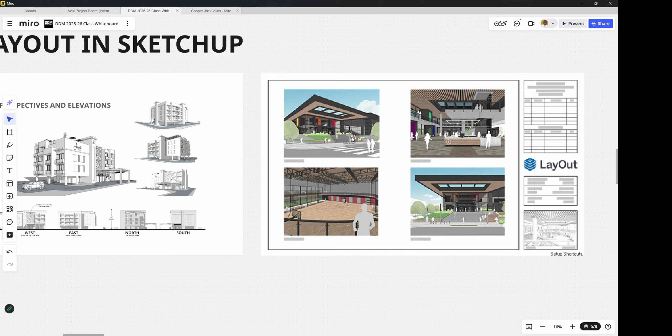If you're working mainly conceptually, for production of construction drawings you'll need more advanced tools like Revit. But for schematic design, a lot of stuff you do in CSA for conceptual designs—especially for your desk crits, interims, or even final presentations—you could configure one of your sheets if you do your initial sketches in SketchUp. You can configure a sheet together.

Next time we meet, I'm going to show you how to sketch concepts in SketchUp, just like how you sketch on paper—how you can come up with a concept and do it all in 3D very quickly without any complication. But that's where we're going to end it for today's class.

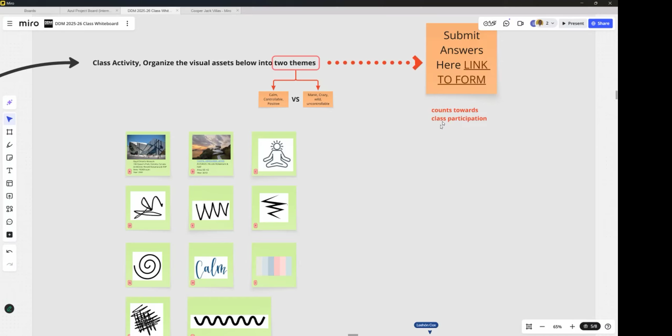Sir, sorry to interrupt, but for the last class, you did an exercise - I don't know if you wanted them to send it in - where it was like calm versus manic, and there was a link. Right, yes, there was a link. We did do that as a class activity, which is here. Yeah, there is a link there to submit it.

So yeah, I think because we were moving in the class pretty quick, this was pretty simple. The thing is, I can't turn it in because it says I've already done it from the first time I registered, which was some years ago. So could you revamp the link possibly, please? Yeah, man, no problem.

If you already did it already, it's fine. What I need to have is your name so that I can record it there, because you did it already, you already know what the answers are. I just need to record that. But this is a class activity, so I don't grade it with percentages. I grade it with you did it or you didn't do it. So that's class activities - I don't go down in the details, it's meant for just participating in the activity.

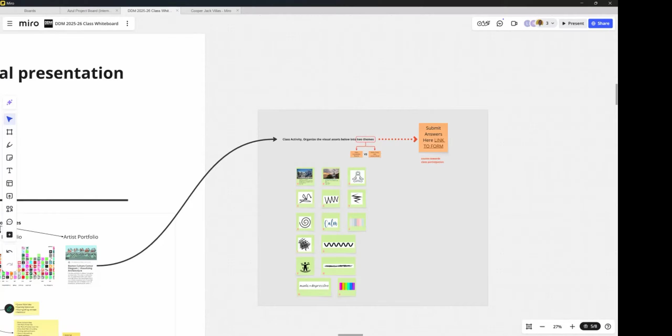Right, okay, so that means it's already done. Right, so it's already done.

Just to be clear, for the InDesign activity, I was looking through the submit the exercise, but after that I see the concept wireframe. It's similar to what we did in class last week, right? That is true, it's similar.

But we're just doing a completely different one? You're doing it for your design. Oh okay, right. So in class, what we did, we reverse engineered posters - we selected a poster that was already done, the architectural presentation sheet, and we reverse engineered it so that we could understand exactly what wireframing is, right.

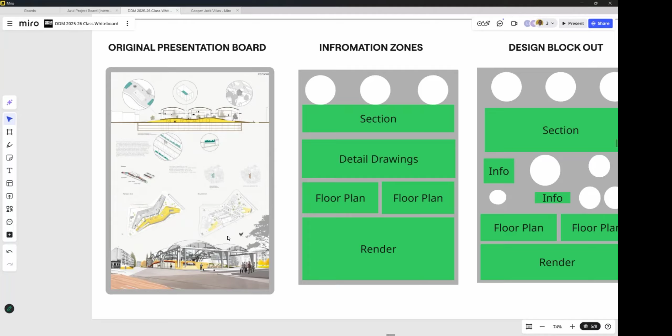And we went through how we break this down in terms of shapes - this is what it would look like. For your own actual assignment, no.

So meaning when we go to the class website now, and let's say we want to submit the studio-based assignment, you are going to create your own poster. And the first step to create your poster, we did it in 3 steps. The first thing we learn how to do is how to use InDesign - sorry, Illustrator, I mean InDesign. So we did a little thing in class, and you're to submit that thing that we did.

The second thing we learned is how do we create a wireframe, which is just a layout of our sheet - you know, I want to put a plan here, I want to put a photo here, I want to put a label here. And we just represent it in these boxes and shapes. So you're going to do one of that for your poster.

And the last thing is to submit the actual poster, like the actual design, right. I just chose to separate them so that we don't get things mixed up. All right, okay sir, thank you.

And this is for ritual? This is using your ritual content from your ritual project. So you definitely don't need to be creating any content - you already have photos of your model and plans and drawings. Use that content to design a presentation sheet in InDesign. You have to use InDesign, right?

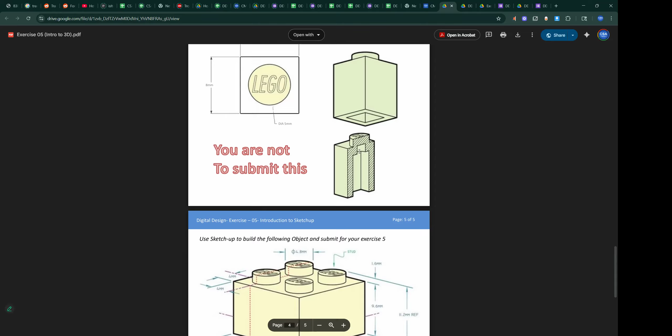No, because if you look on the handout... oh, hold on, you're talking about the one you're doing for the exercise or the practice one we were doing? The one for the exercise. Right, so yes, this runs all the way up, because of how this section was cut, it was kind of cut either after it, so it's pretty much the center part in here.

All right, on the submission thing, right, so same thing with me. What I did, I ended up cutting it like here, that's why you're not seeing it. So it doesn't matter where you cut it, I just need to see an example of a section. All right.

Back to SketchUp. So the trick when dealing with sections is... where are my tools? All right.

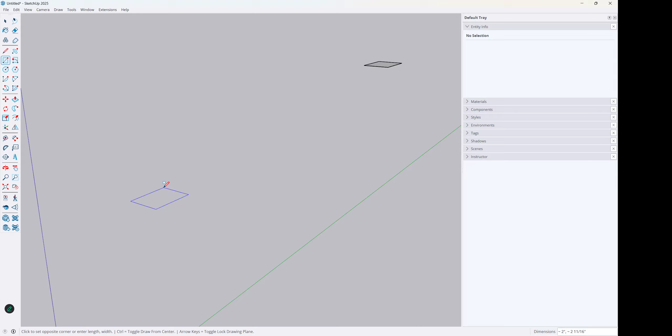If you have something here, maybe something very small like here, and then you have another thing here, let's say you have that and you have that. Now if I try and do a section like this, what you notice is I have a huge section.

Yeah, but you have something, man. You have something, a little dot, something far out in the distance that's causing the section line. Maybe it's hidden, but something is pulling it all the way to Mobay. So how do I find what's pulling it all the way to Mobay?

That is a... I mean, okay, you could use the outliner. We're going into more detailed things now, but the outliner is another feature in the tray. So if you go to Window, where is this again? Window, Default Tray, and turn on your outliner. The outliner shows a list of every object in your scene.

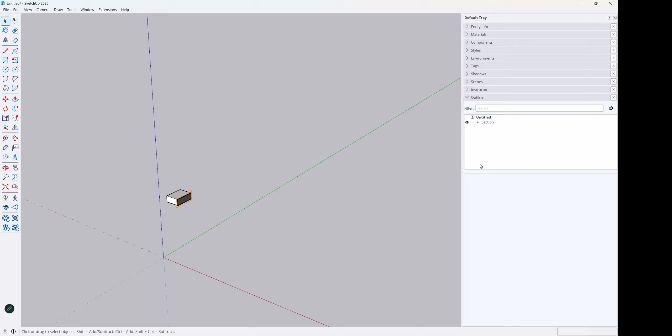Hopefully, I don't know if it would show you something that's far out. Ultimately, you can just create a new SketchUp document and paste it in there and you should be fine, if for whatever reason there is some duppy or ghost. There is literally a duppy because there's nothing else there. Just open a new document and paste the object in there and work with it.

Paste the object in there, so I have to do it over? No, you can copy paste between SketchUp files, which is pretty cool. So if you have two SketchUp models open, you literally can do Control C, Control V, or you can do Control C and paste in place, meaning it would paste it in the exact position that it is. For example, if I have another SketchUp here, if I have one here and I have one here...

I can just select this guy here and go to copy. I can go here and I just go to paste. And there you go, it's pasted, even with the section line. See, going around the guy again.

Or if I go to paste in place, it will paste it in the exact position that it was in this file. So that's another cool thing with SketchUp.

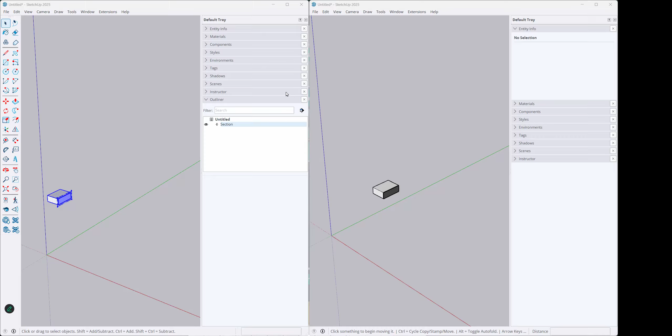And you put all of those scenes on a sheet, and then you save your layout as a PDF. Layouts, where are the layouts? So remember, well, I mean, all right, I'm gonna save the video so you can watch it again. But just so you know, part of what I did after I modeled the object, I went to File and Send to Layout, and that's how it transported the SketchUp file into Layout, and then I duplicated it. Yeah, it will be in the video. Okay, all right, so I'll just save it and you'll have it tonight. Give it about a half an hour or so to transcode and upload.

Okay, right. But as I said guys, this is going to be a major tool for you. It's very easy to learn, and hopefully I can show you guys some tricks. Any other questions?